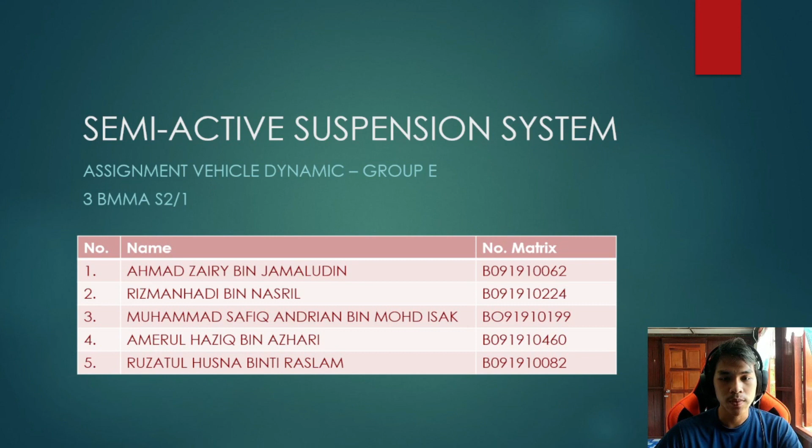We are from Group E, and this is the video for the vehicle dynamics assignment, and our title is semi-active suspension system. So, a semi-active suspension system is a type of automotive suspension system that controls the damping force of the shock absorber in response to input from continuously varying road surfaces. It is intended to approximately implement the active suspension with a damping force adjustable shock absorber.

The semi-active suspension system is based on passive and active systems. The presented one contains instead a passive shock absorber and a variable shock absorber as an active damping force that is automatically controlled by an integrated regulator. The damping force is modulated in accordance with the operational conditions which are continuously controlled by sensors connected to the CPU.

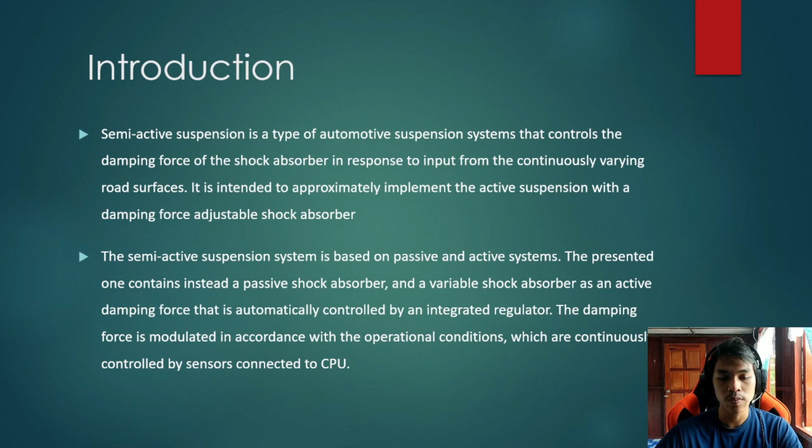So this is a literature summary for Journal 1. So methodology, number 1 is vehicle mathematical model. In this analysis, the researcher uses multiple mathematical equations, and these equations of motion are for multiple responses of the vehicle, which are the bounce, pitch, and roll responses of the vehicle body.

Number 2, simulation using a 4-poster hydraulic shaker test rig. The 4-poster hydraulic shaker test rig, which is available at the Institute of Automotive Engineering of the Technical University of Braunschweig, is used for the verification analysis of the mathematical vehicle model. A schematic and drawing of the 4-poster test rig setup with the test vehicle measurement instruments is shown in the figure. The hydraulic cylinders of the test rig have a dynamic force limit of 21 kN together with plus minus 125 mm displacement range. Furthermore, a 30 Hz low pass filter is used for filtering the road profile and the measurement signal.

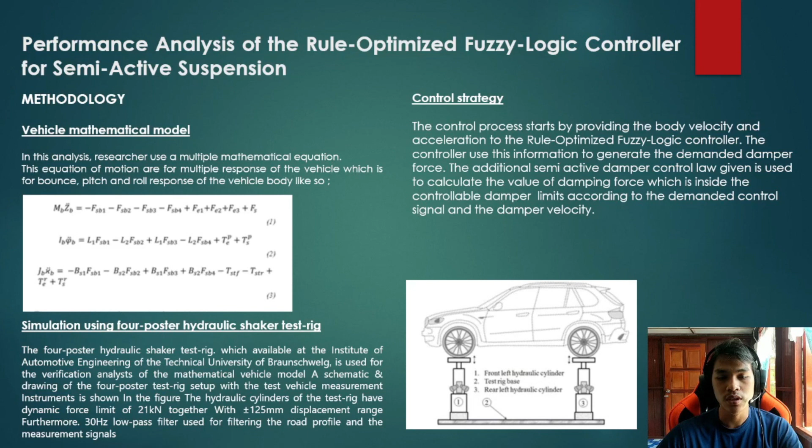Number 3 is control strategy. The control process starts by providing the body velocity and acceleration to the rule optimized fuzzy logic controller. The controller uses this information to generate the demanded damper force. The additional semi-active damper control law given is used to calculate the value of damping force, which is inside the controllable damper limit according to the demanded control signal and the damper velocity.

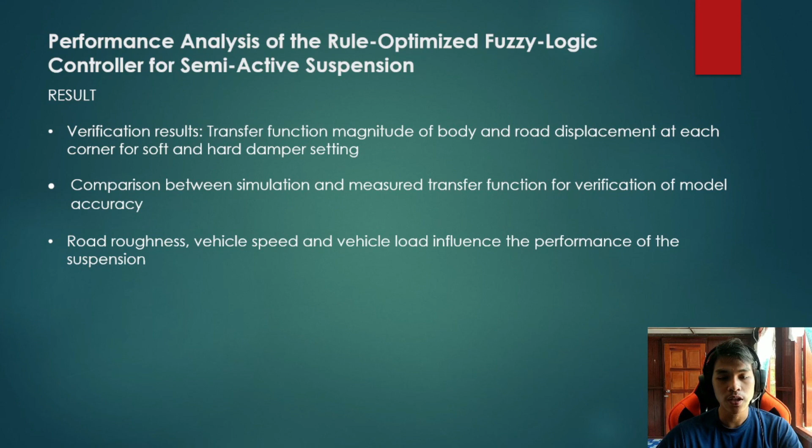So the results are from verification: transfer function magnitude of body and road displacement at each corner for soft and hard damper settings, comparison between simulation and measured transfer function for verification of model accuracy, and road roughness, vehicle speed and vehicle load influence the performance of the suspension.

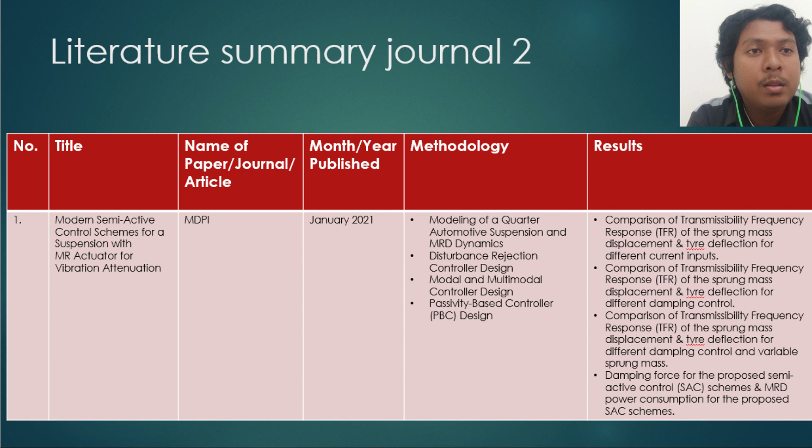I will present this journal. Its name is Modern Semi-Active Control Schemes for a Suspension with MR Actuator for Vibration Attenuation. So methodology, modeling of quarter automotive suspension and MRD dynamics. So first is the vertical model of a quarter car. So the definition of the dynamic relationship of the sprung mass and the unsprung mass.

So the next one is MRD dynamics. This work considers a polynomial model for the MRD. The polynomial model parameters can be experimentally estimated from the force displacement measurements only, and the model is an expression for the damper force as a function of the piston velocity and the input current of the damper.

So next is the disturbance rejection control design. So the control aims for the indirect regulation of the system state by the regulation of the so-called flat output, thereby fulfilling both objectives of achieving comfort and road holding.

So the modal and multi-modal control design. So first is positive position feedback control design, and the second one is multi-positive position feedback control design. So the first one, the PPF terminology comes from the fact that the position coordinate of the structure equation is positively fed to a virtual second order filter, and the position coordinate of the compensator equation is positively fed back to the structure. The multi-positive position feedback, MPPF, is a modal control strategy to attenuate mechanical vibration on different modes, which is an extension of the PPF approach, similar to multiple virtual passive absorbers located in parallel form to the primary system.

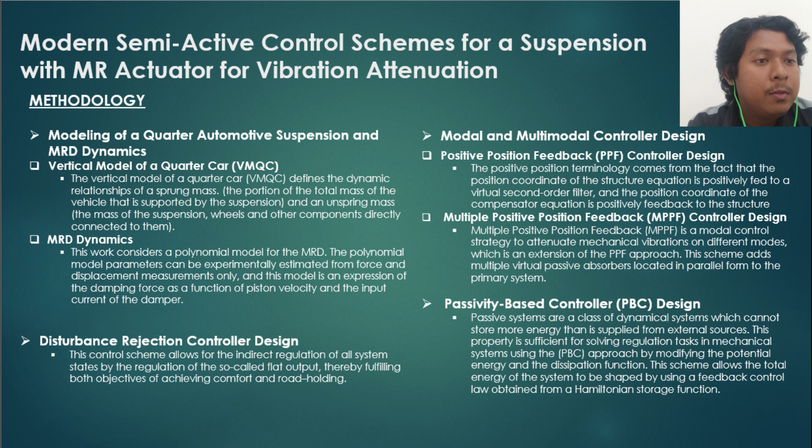So the passivity based control, PBC, design. Passive systems are a class of dynamic systems which cannot store more energy than the supply from the external source. This property is sufficient for the vibration absorbing regulation task in the mechanical system using the PBC approach by modifying the potential energy and the dissipation function. So next is the result.

So, comparison TFR of the sprung mass displacement and tire deflection for the different current input. So the analysis of automotive suspension reported and implemented in this section evaluates the proposed SACs. The comfort and the road holding performance of the suspension can be evaluated with the transmissibility frequency response of the sprung mass displacement and the tire deflection displacement.

So next is the comparison TFR of sprung mass displacement and tire deflection of different damper control. The effectiveness of the three considered SACs proposed in this work is compared through numerical simulation. The PPF expressed in the equation is designed for two different objectives. So first, vibration mode improvement at low frequency, and the second is the high frequency.

So next is comparison TFR of sprung mass displacement, tire displacement and tire deflection for the different damper control and variable sprung mass. So as one can observe the soft suspension represented by open-loop operation is the worst evaluated in both criteria. On the other hand, a rigid suspension operation improves both performance indicators.

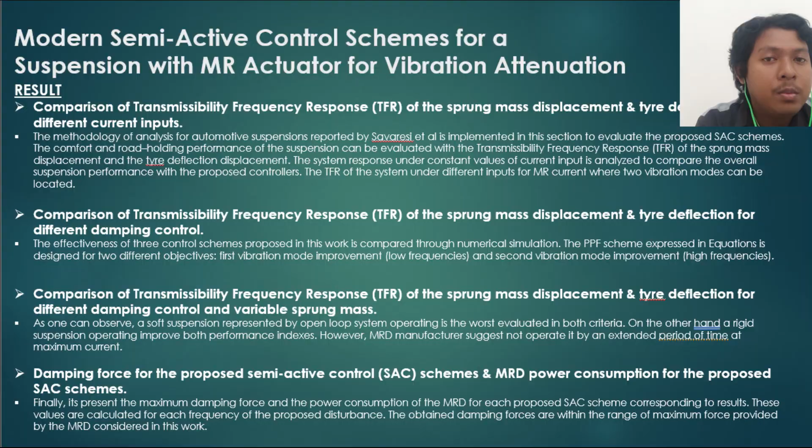Okay, I will talk about my journal, whose title is Hybrid Control Strategy for a Semi-Active Suspension System Using Fuzzy Logic and Bio-inspired Chaotic Fruit Fly Algorithm. Okay, the journal is from the Department of Electrical and Computer Engineering, Carnegie Mellon University. Okay, year published is March 2017.

Okay, for the methodology, the first one is the semi-active suspension system and the quarter car model. The semi-active suspension system reduces power consumption and increases vehicular stability during transportation compared to the active suspension system. The system utilizes a damper whose characteristics can be changed externally using controllers, in contrast to the fixed conventional active and passive system. The design of the semi-active system can be represented with a quarter car model where the masses

can be classified into sprung mass and unsprung mass MU. The sprung mass is damped by the suspension system and the unsprung mass consists of the mass of the components of the vehicle system such as the brakes and the steering wheel.

Okay, the second methodology is a fuzzy controller for MR damper. A fuzzy controller works on a set of rules that are based on the mathematical analysis and system modeling. The rule base consists of if-then rule statements indicating conditions for control. The parameters are the input of the fuzzification interface where conversion to fuzzy information occurs. After comparison with the fuzzy rule set, the defuzzification converts the conclusion to actual parameters.

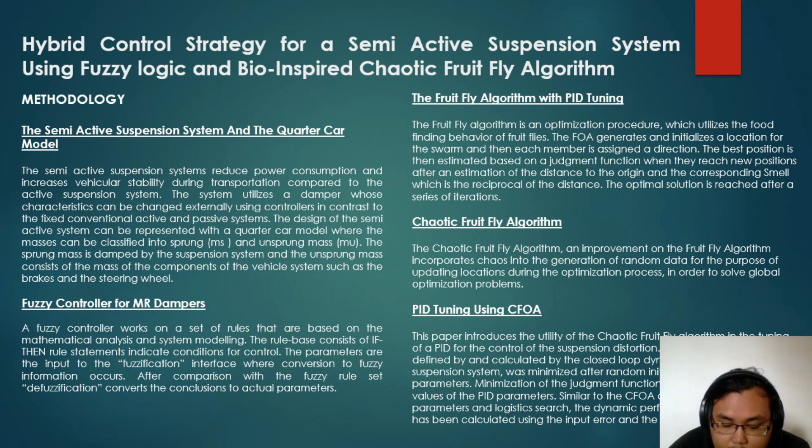Okay, for the result, the guiding equation of the semi-active suspension system tuned by CFOA-based fuzzy PID was solved using Simulink, and based on the optimal values of the PID gain parameters, its performance was judged. The sprung mass acceleration, tire loading, and the suspension distortion for the proposed system were compared with those of the active system,

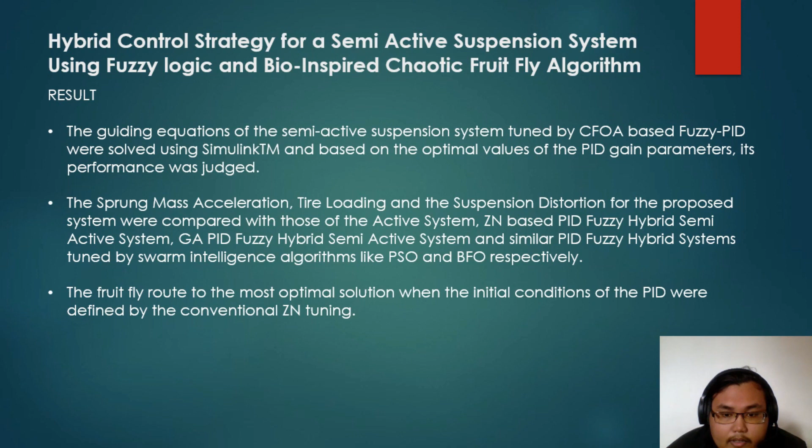ZN-based PID fuzzy hybrid semi-active system, GA-PID fuzzy hybrid semi-active system, and similar PID fuzzy hybrid systems tuned by swarm intelligent algorithms like PSO and BFO respectively. Okay, the fruit fly routes to the most optimal solution when the initial conditions of the PID were defined by conventional ZN tuning.

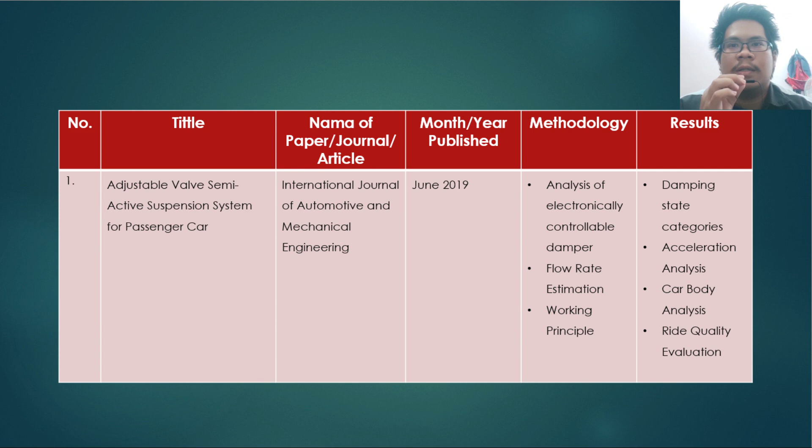Okay, for the next slide, my name is AMERUL AZHARI. So the next slides are about my journal. The topic of my journal is adjustable valve semi-active suspension system for passenger car. So for the methodology, they have three methodologies. The first methodology is analysis of electronically controllable damper.

When in compression, the fluid always flows through two flow paths: through the internal piston and the external bypass valve. The damping through the internal piston is determined by the area of the orifice and the stiffness of the shim stack, whereas the flow through the bypass valve depends upon the adjustable displacement pin that is controlled by the application of the voltage.

So the second methodology is flow rate estimation. The damper force can be expressed as a pressure drop and the difference of the cross section of the piston tube and the piston rod, as expressed in the equation: F damper equals delta P times, in brackets, A tube minus A rod.

So the last methodology is the working principle. A slider was used to vary the area according to the input pulse to the stepper motor. Changing the position of the orifice is categorized into four states. These states refer to the adjustment from soft to hard, respectively. Table 1 shows the damping state category.

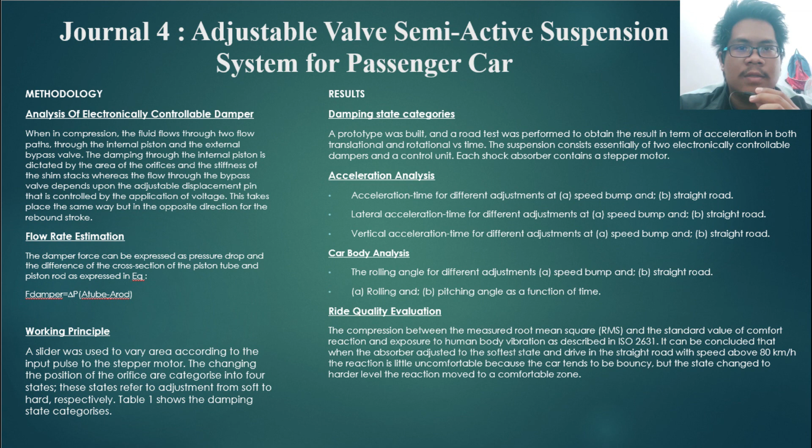So, for my part, journal 5: ride comfort optimization via speed planning and preview semi-active suspension control for autonomous vehicles on uneven roads. So, for the methodology, road profile information. Due to autonomous cars' excellent environmental awareness capabilities, two types of road profile information are studied in this paper: preview road information and global road information of a given driving path.

Next, dynamics of semi-active suspension. To design the preview suspension controller, a quarter vehicle model is used. Then, the multi-objective problem. Its requirements: the driving time is minimized, the comfort performance in each RI is optimal, the sum of v during the entire trip is minimized, and the last is that the preview suspension can adapt to the speed variation.

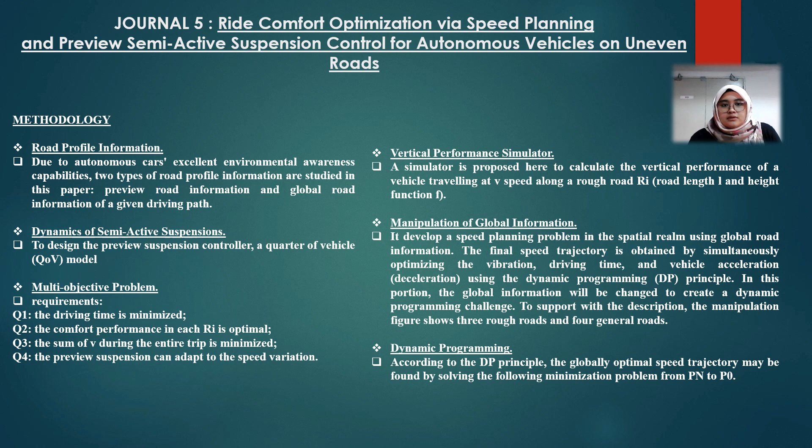Next, we move to the results of journal 5. We found two results, which are comfort performance at constant speed and multi-objective performance at planned speed. So for the comfort performance at constant speed, the performance of the hybrid HVMPC method at various constant speeds and on a variety of typical roads will be simulated in this section.

To further illustrate the characteristics of the proposed controller, we simultaneously evaluate the suspension performance with a sample time of 1 millisecond and a simulation step of 1 millisecond for the following control methods in order to better reflect their characteristics. In the following section, this control method will be evaluated under two different types of pavements, which are designated as independent long wave roads and serial short wave roads, respectively.

The first one, independent long wave roads. In this case, an independent bump is used to simulate long wave pavement. Given the length and height of the bumps, the pavement can be described by a sinusoidal function. Then, serial short wave roads: in real-world driving conditions, the bump may not appear independently. It has been possible to introduce pavement geometry with serial bumps, for example.

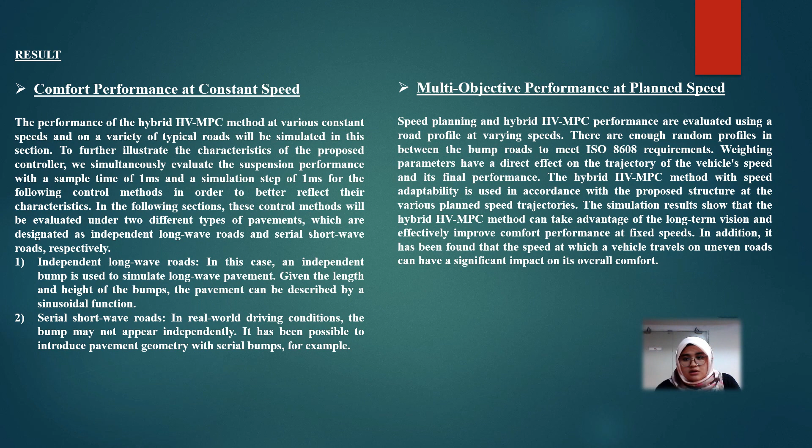So, for the conclusion of our assignment on semi-active suspension, semi-active suspension systems improve not only the ride comfort and control of the vehicle, but they also improve the vehicle's road holding. These systems have the ability to adjust the amount of damping in response to measurements of the vehicle's ride and handling characteristics. In recent years, people have become more concerned about how their cars affect the environment, how much energy they consume, how safe they are, and whether or not they are comfortable while driving.

In contrast, modern automobile technology has progressed to the point where it is extremely difficult to improve the mechanical structure of a vehicle. Automotive electronics technology has emerged as the latest fashion in the modern automobile industry.